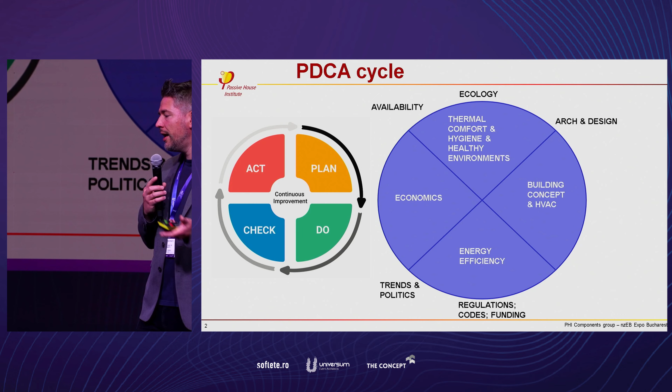What we're actually doing in all of building physics, architecture, and engineering is a management system. We have this PDCA cycle, maybe you've heard of that: plan, do, check, act. It's like an ever-spinning circle, and we're trying to optimize things along the way. Optimizing means not only energy efficiency or lowering energy consumption, but also finding the economic sweet spot, having healthy indoor environments, achieving the best possible thermal comfort, superior indoor living quality, and finding a proper building concept that suits you well.

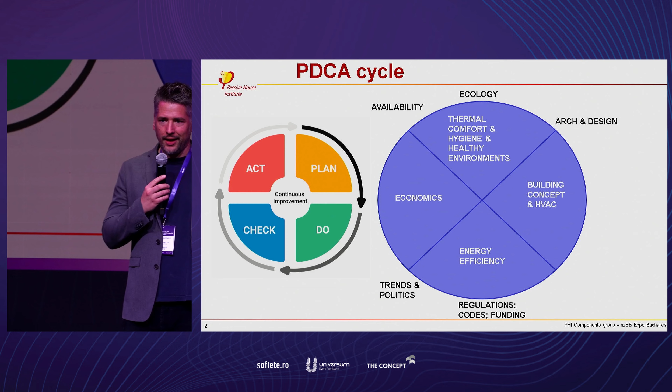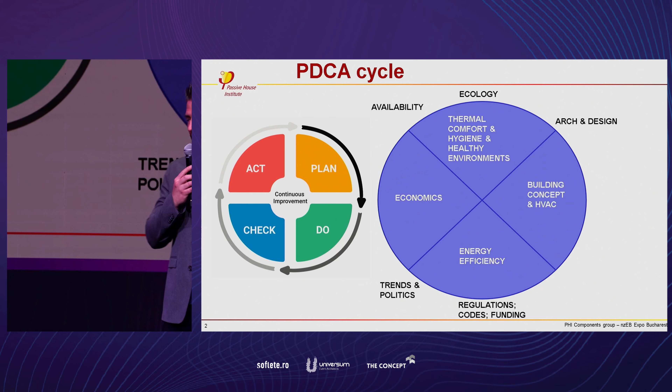We are heavily influenced by external factors such as policy, regulations, and fundings, and this is continuously changing over time. So we need to adapt very quickly, and what I would propose is to do it right away, regardless of the politics, and strive for a concept that meets all these criteria from the very beginning.

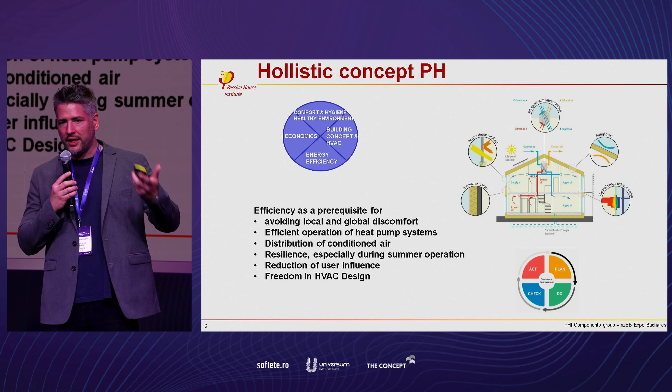We are also trying to achieve economic sweet spots, and to achieve that we need an efficiency that allows us to meet such standards. It's actually a prerequisite for several things, such as avoiding local and global discomfort. Comfort is what makes people feel comfortable in their living environment - influencing factors like humidity, air temperature, and radiation temperatures, but also local discomfort such as drafts. For example, when you're sitting in front of an old window, you feel the cold air descending.

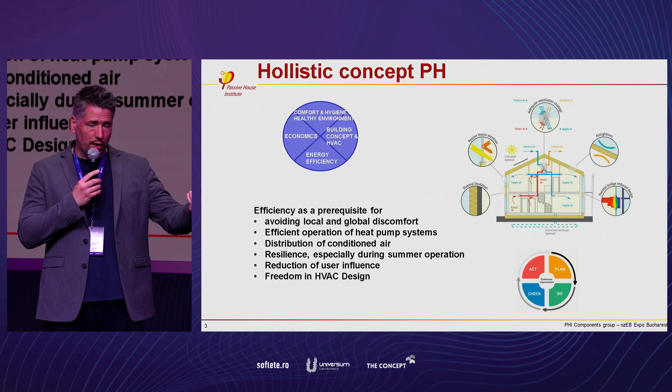It's also a requirement for efficient operation of a heat pump system - the lower the temperature difference for a heat pump, the better the efficiency. You're flexible in the use of systems, and it allows you to distribute conditioned air also via the supply air.

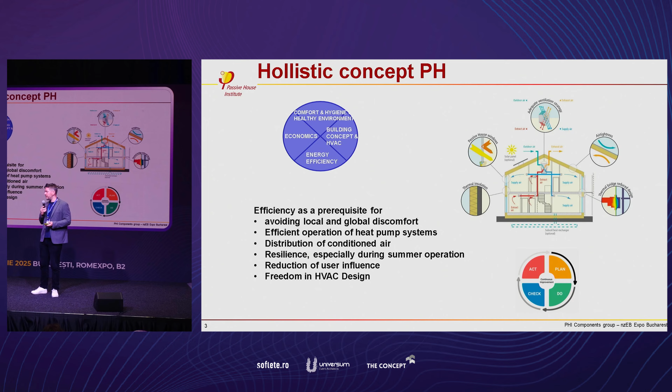Another really important factor, and one we're talking about today, is resilience. We are in the middle of a climate change - it's nothing that is coming up, we are already in the middle of it. That means summers will be hotter, sometimes drier, sometimes more humid. We need to make our buildings more resilient so we can achieve thermal comfort also in these ever-hotter periods. Achieving efficiency helps us get better summer comfort, better operation during summertime, with lower electricity grid peaks and so on.

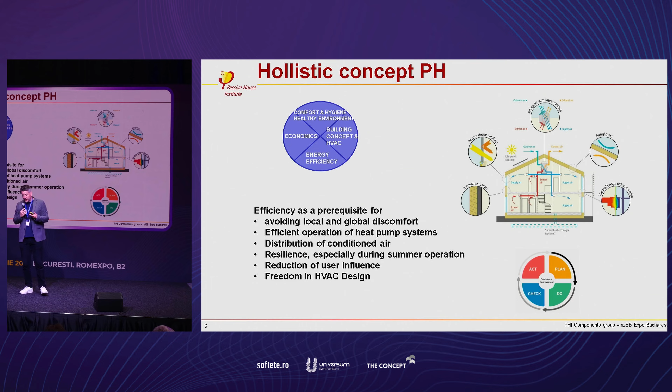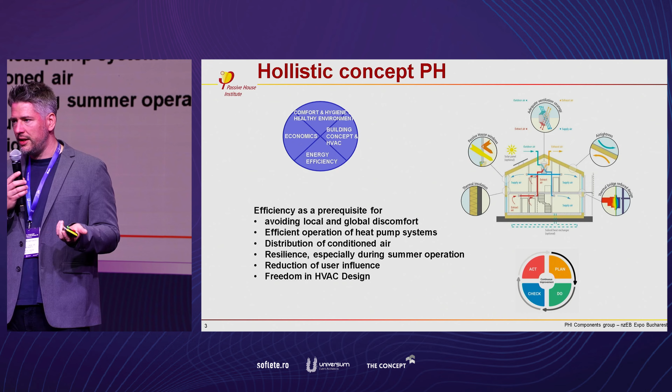Another aspect that comes into play is the reduction of user influence. The more efficient and robust your building is, the lower the impact of user influence - it doesn't matter if we turn up the heating to 25 degrees, the consumption is still lower compared to an uninsulated building, for example. Another aspect: efficiency gives you a certain freedom in the design of your building. You can, for example, have windows from floor to ceiling without any radiators. You can heat via the supply air, by conventional heating, and so on.

So I chose 5 main topics that we need to address when we talk about efficient components. The first one, which I already mentioned, is summer resilience. That means we need to think of passive measures - can we use passive shading? Can we use insulation with cool colors? Do we have HVAC components that work for both winter and summertime? For example, reversible heat pumps that can provide summer cooling and also distribute heat during wintertime.

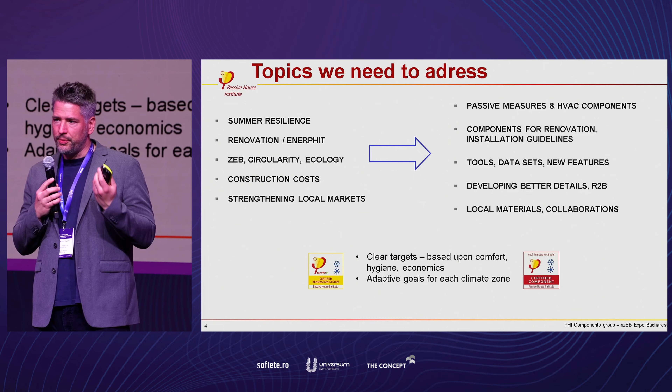We need to look at renovation, because this is actually the key to mitigating climate change - it's not new builds. That's one part, but we need to think of the existing building stock. We need to think about how we can renovate them efficiently to avoid lock-in effects.

We need clever designs, we need installation guidelines, we need a practitioner's tools to make that work. We need to think of the regulations and the directives, like the Zero Energy Building Directive. What will that be for our building concepts? We need to think of circularity of materials, ecology, and where we get our materials from.

So therefore, we need to develop tools, available data, we need to be very transparent and have new features implemented in the database guidelines and in the database. Construction costs is a very complicated topic because that is one of the big hindering factors for being efficient.

Sometimes efficient design does not need to be more expensive than conventional design. It's about repeating details. It's not for reinventing the wheel all the time. It has been done 10,000 times. So let's use the details that are promising to make construction cheaper and also more efficient.

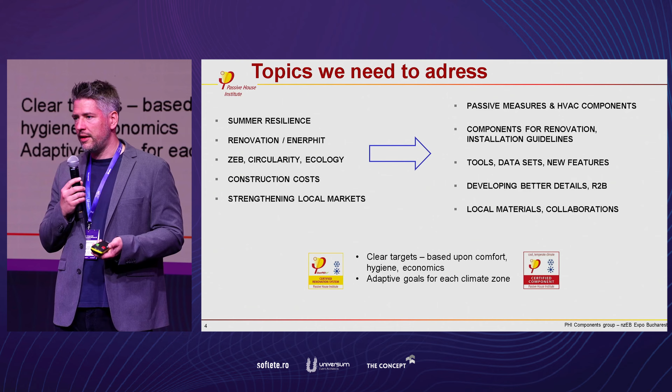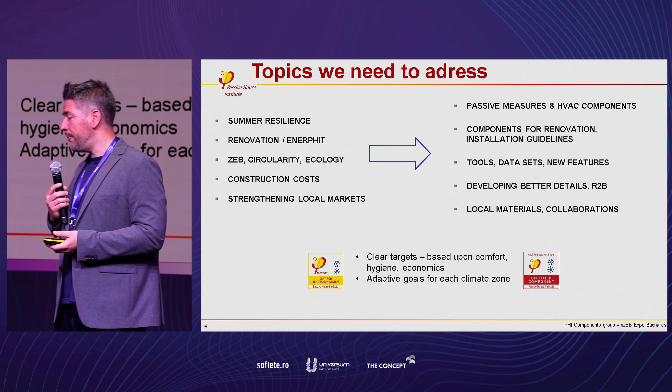And on the other hand, we need to strengthen local markets. That is a very important factor also from an economic point of view, that the building should financiate from itself and mainly be supported by local manufacturers, local craftsmen, educated people that work on site also for the local economy.

So this is what we are addressing in the component certification, which is based on clear targets, on the one hand based upon comfort, hygiene and economics, and we have adaptive goals for each climate zone.

So when you would visit the database, you can find approximately 1,300 certified components from approximately 40 categories, and they are optimized for different climate zones, right? So it doesn't make sense to have like a quadruple pane maybe in Spain, and this is why I said we are trying to find the optimum.

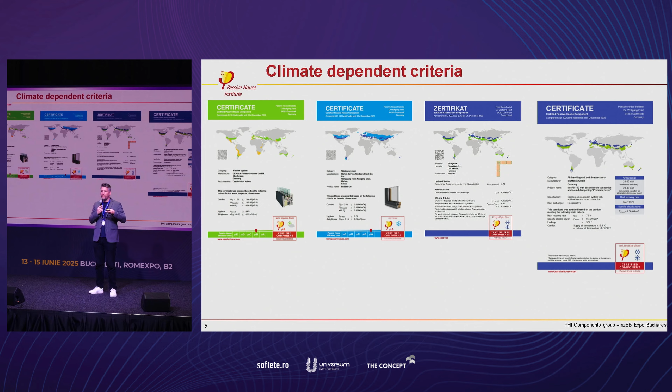So for each climate zone, we would recommend the values that are needed to achieve hygiene and comfort. And so when you look at the certificates, you can find that you can see the world maps indicating the recommended climate zone, right? So this is based on economic considerations in different categories.

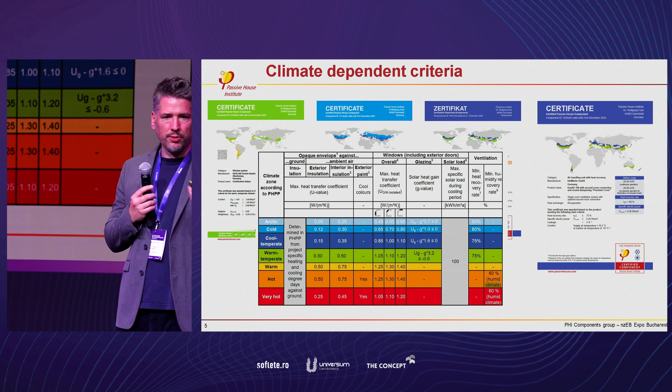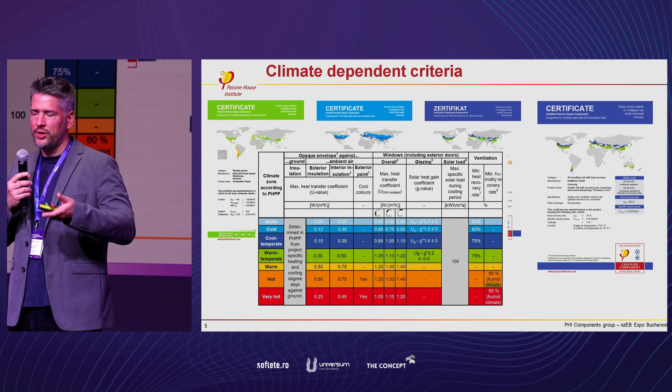So you can find like the recommendation to achieve passive house or EnerPHit standard that should cover all ZEB requirements easily on this list, right? Because the ZEB definition is actually a building that consumes so little energy that it can be covered by renewables on site. So that is actually by definition kind of a passive house, right? Because all other buildings will not manage to cover the consumption on site.

So when you would look at the database, you could find the recommended values for the different topics, for example, for the transmission values, for the walls. You can find it here.

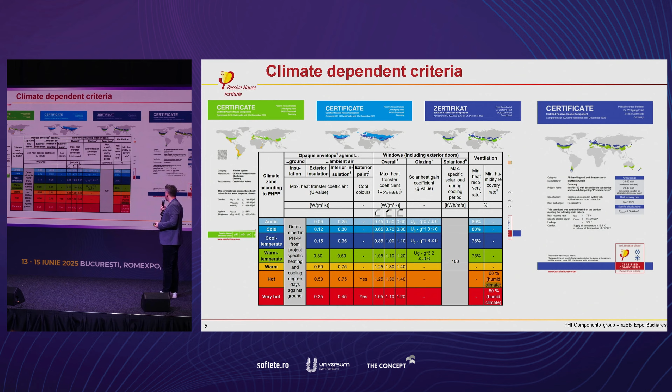So the component database is a free-to-use tool, right? So all these components are incorporated in the Passive House Planning Package as well as on the component database, and all these data are there transparently shown.

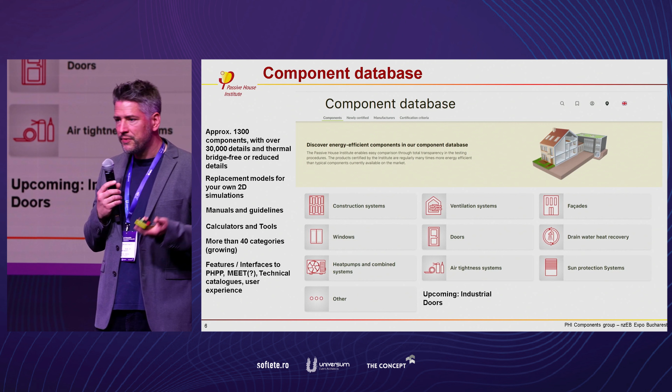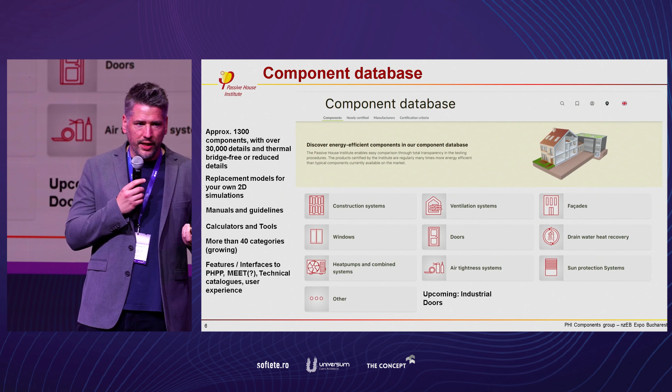With approximately 30,000 details right now that are offered for free, thermal bridge free or reduced thermal bridges for the construction of things. But it also contains, for example, replacement models if you want to conduct FEM simulations by yourself. So when you have, for example, a complicated 3D structure, such as a thermal separation for balconies, you can find guidelines how to reproduce them for yourself in your simulation.

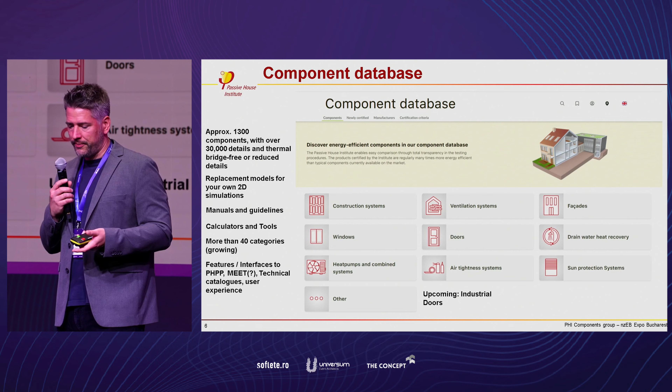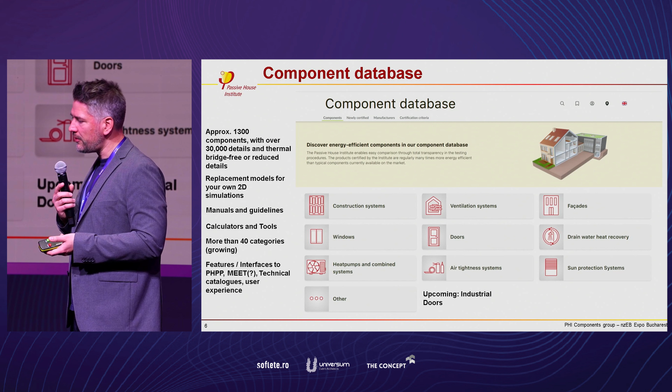It contains manuals and guidelines, some calculators and tools, for example, for windows, window calculators. And what we're trying to meet in the future is that we have a full incorporation into our software kits, such as the PHPP, such as the MEET tool, which allows you to calculate the carbon footprint of a component or of a material, and to develop the user experience more and more.

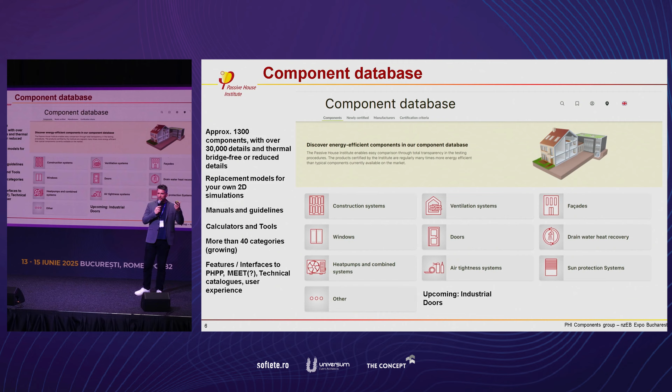So what you can see here in the background is these are the main categories, but each category contains a couple of subcategories, right? So when you would look at the windows, we have standard windows, but we have also window systems, fixed glazings, spacers, and so on.

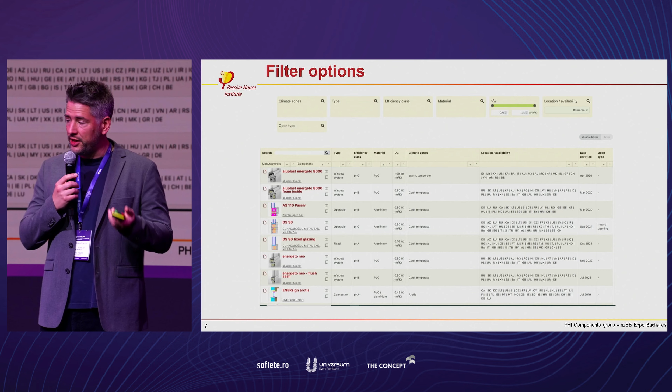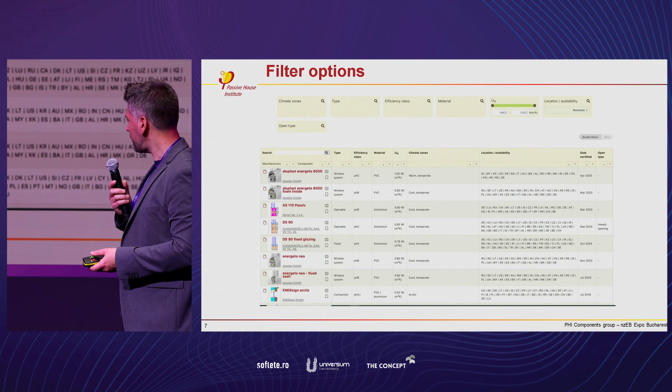Okay, so when you would use the database, you can filter, and this is what I said at the beginning, that this is something really important. So we don't want the components to travel around the world. So you can choose or filter for your local markets, right? So in this case, you can see the location availability as Romania already depicted, and then the database would show you available components, for example.

You can also use the world map and zoom in to see if there's like a production site nearby or a seller, a vendor that can bring the products to your country. When you click on detail, you can sometimes see that there's like a manufacturer, and sometimes they have vendors or resellers, so you can find these suitable options here.

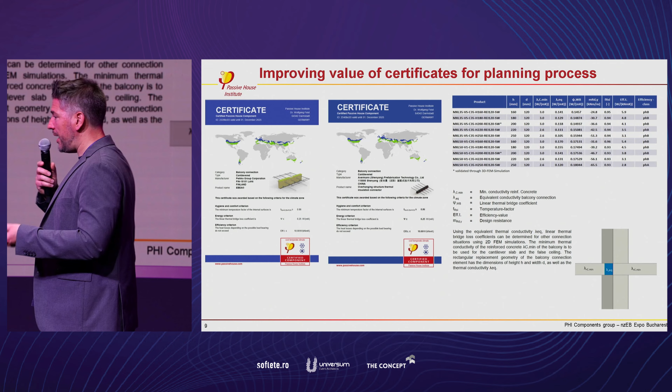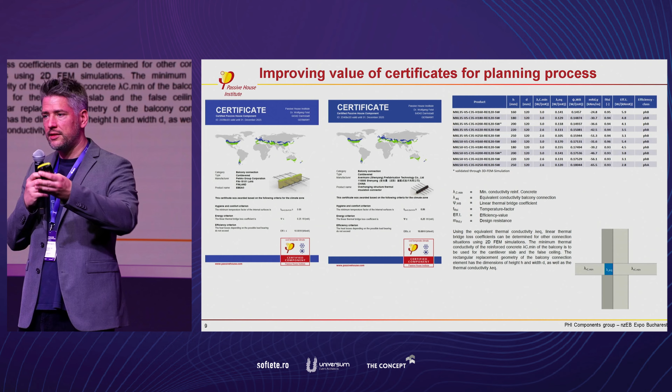Another aspect we're trying to address is improving the certificates for the planning process. In the past, we often just had a result - it says this is the efficiency value, this is the thermal bridge, this is the value whatsoever. So what we're trying to give now is a guideline, a manual, how to use the certificates.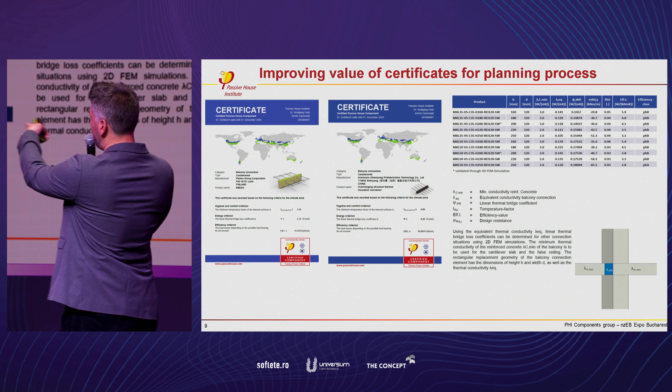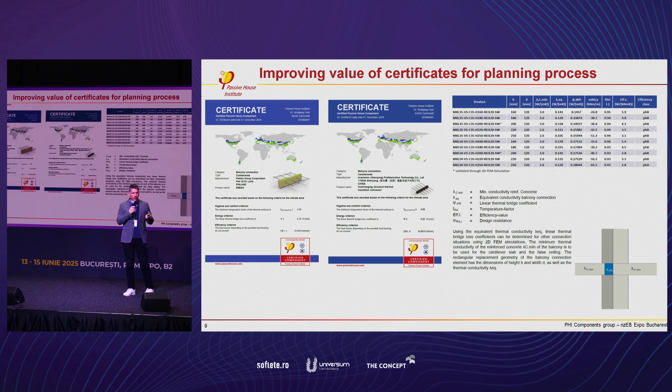And to use them for your own simulations again. So when you look at, for example, a balcony separation element, they're quite complicated to simulate - it's a very complicated structure, you need to run a 3D simulation. But this certificate contains 2D replacement values, so you can run your own 2D simulation with a substitute model like that, so you can use that for your own simulations.

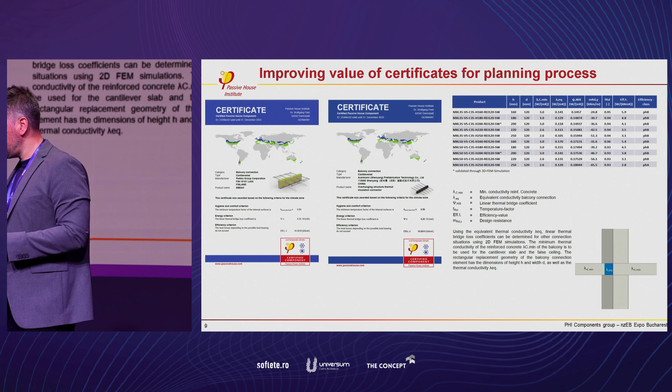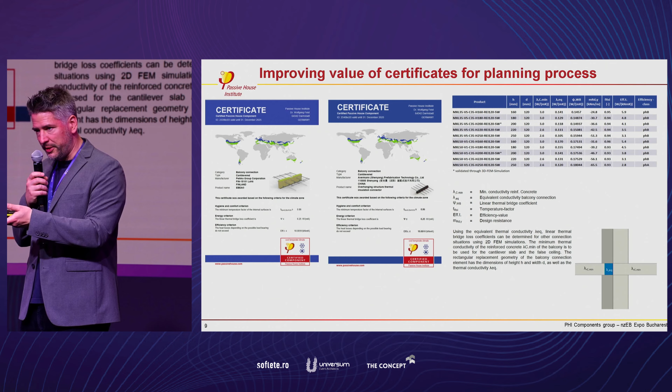And if you don't want to use that, you can still find the thermal bridge itself on the certificate, but sometimes it makes sense, especially when you have a changing construction or a combination of different materials - for example, in combination with a terrace door.

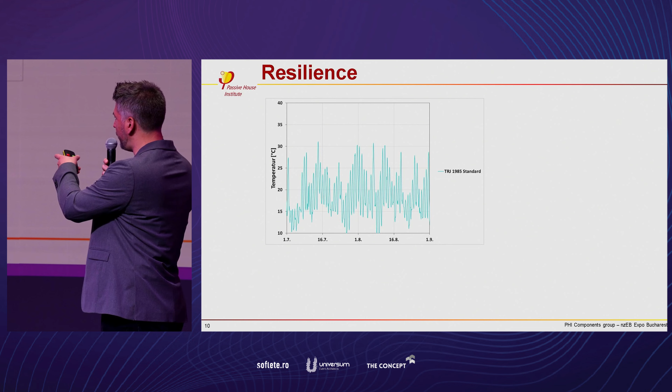One main topic is summer resilience, or climate change and how that will impact us. What I'd like to show you, when I'm conducting summer simulations to see if there's a frequency of overheating, is the different data sets for the design period. You can see the design temperature for the year 1985, then 2004, 2010, and the 2035 prediction.

And when we look at the 2050 prediction, we even get bigger amplitudes. So on the one hand, we have a general increase in temperature, but what is really challenging for us building planners are the peak temperatures - especially the hot nights, which we cannot release as easily.

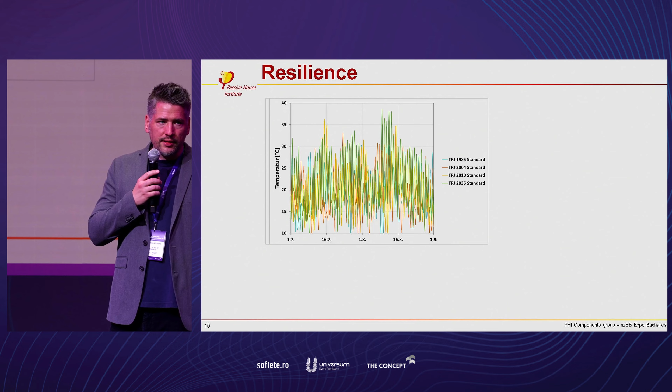So that makes certain passive measures not as effective anymore. When it's 29 degrees outside at night, it doesn't make sense to open your windows because you cannot release the heat properly to a comfort level. If comfort temperature during summertime might be 25-26 degrees, and it's 29 degrees outside, we are not improving comfort anymore. So we need to think about what we can do in these climates in the future.

In the region where I come from, nobody had an AC in the past - that was inexistent, I never saw that until I was an adult. Now it's become kind of mandatory to achieve summer comfort in uninsulated buildings, because you cannot release the heat through the windows anymore, and you cannot use the building inertia to the same extent for summer strategies. This is something we need to address.

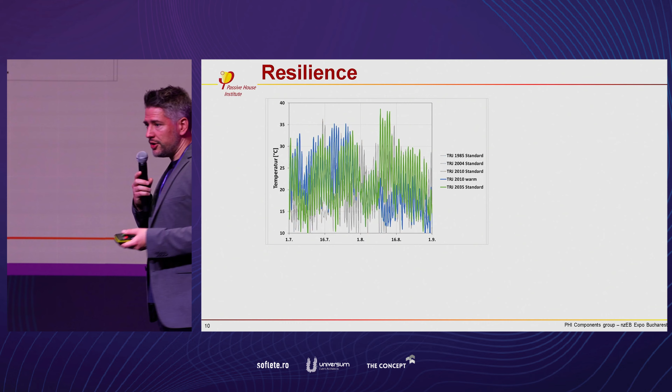It's becoming more and more of a challenge, and this is something we have to tackle - we as planners, we as manufacturers, we as policymakers, whatsoever.

This brings us to a situation where cities are more and more storing heat. We have low albedo values, like streets being very reflective, black cars reflecting everything - the heat is stored during the day and cannot be released during the night, and we can clearly see that. This is a real challenge for cities, and it also means that when we use active cooling systems like ACs and chillers, they will release more heat and heat up the cities even more. So we need to rethink the inner city context.

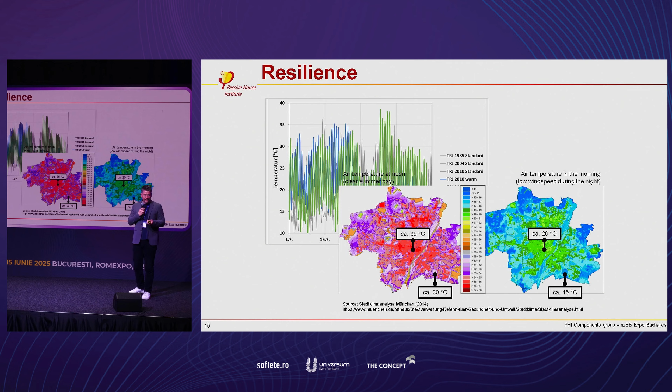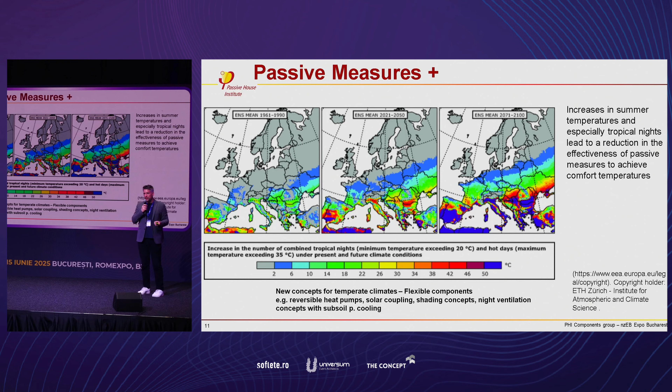That means these days passive measures don't work as effectively anymore, or it's hard to release heat out of our buildings. So we need actually new concepts for temperate climates - hotter climates are kind of used to it, we face other problems here like grid structure and peak electricity, but we need to find solutions in terms of solar coupling, shading concepts, night ventilation, whatsoever.

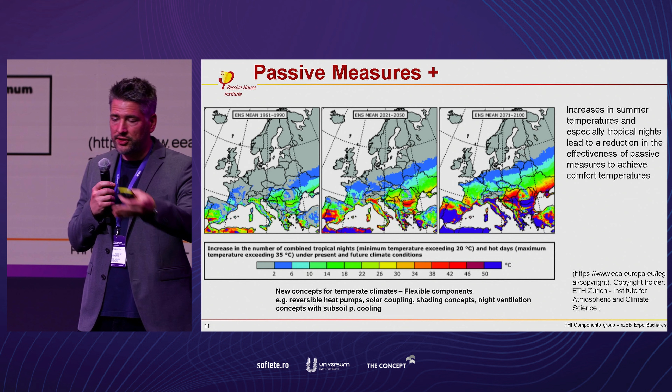So it might be the case that we need pre-cooling via subsoil heat exchangers instead of taking the direct air.

One thing that becomes more and more important is external shading systems. This is also a learning curve, because when you have an AC running, you might not realize how much heat you actually have to cool down and what that means.

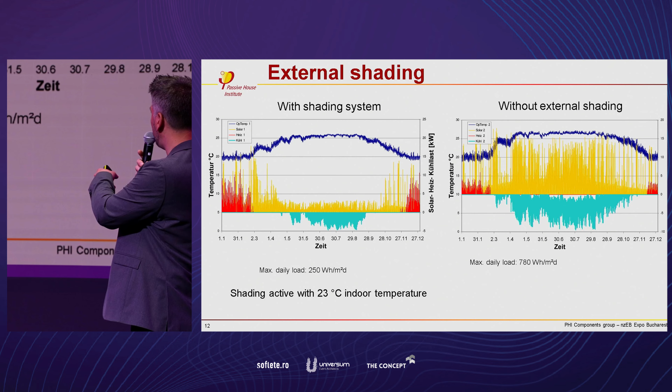So I'm just showing you one example of the difference between a shaded window with an active roller shutter and an unshaded situation. You can see that the daily load is 3 times higher compared to the shaded one. This is actually a passive measure that doesn't cost you any energy and would help us make use of.

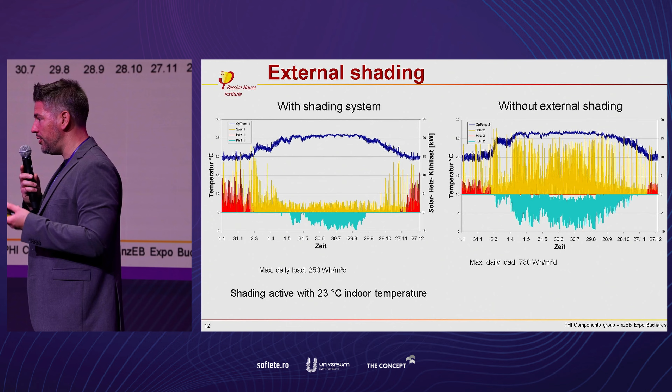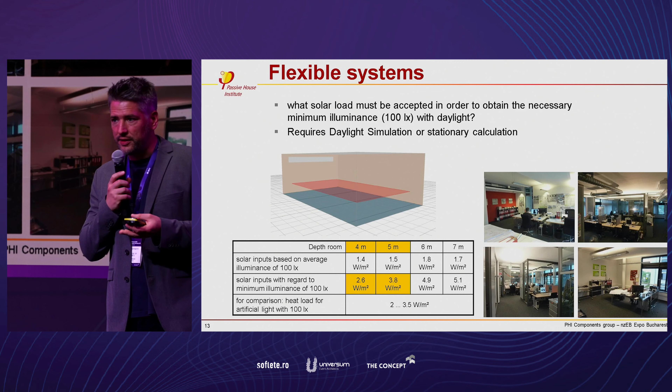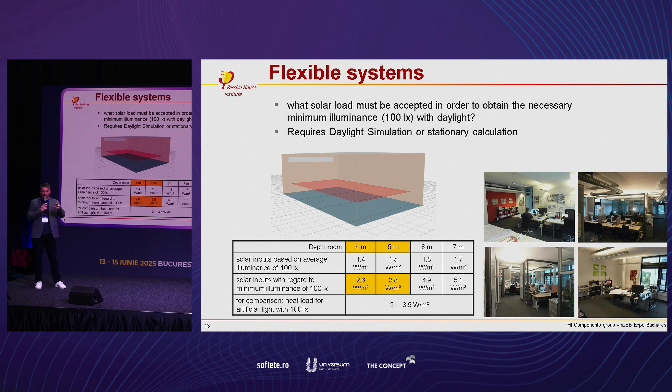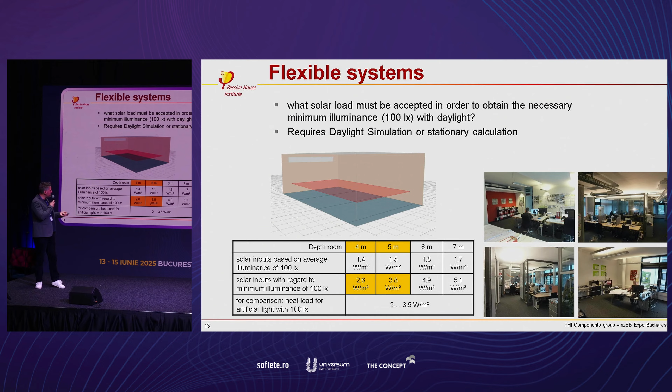We also need a certain development here, because what I often see in consultancy projects is when offices are shaded, they become kind of dark, so what happens is we use artificial lighting again and counteract that. You get these darkish offices which require artificial lighting although the sun is shining. So what we often try to do is find a sweet spot, and calculate the point when the artificial lighting electricity consumption is higher than the cooling demand, for example. It's a challenge for us as engineers.

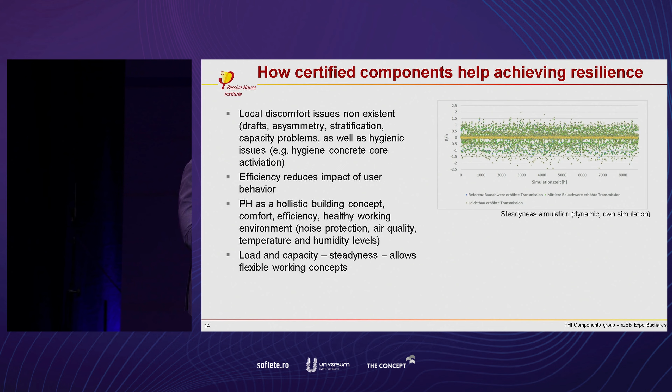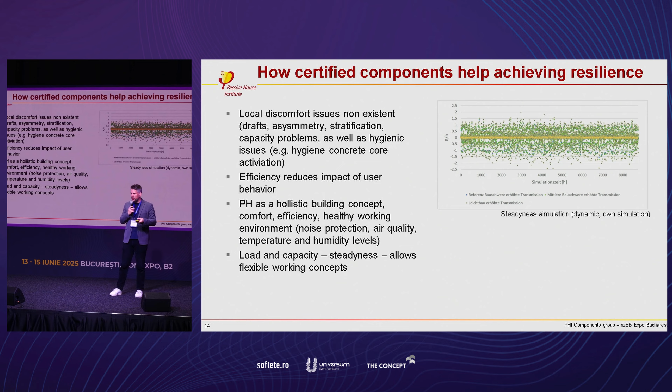The good thing is when you have certified components, you get rid of all the local discomfort issues, as also during winter time, such as stratification, drafts, radiation asymmetry, and you have solved all hygienic issues. So you will not have condensate on the panes forming, you will not have mold growth on surfaces because the water activity is also reduced.

It reduces the impact of user behavior, and the passive house is, what we should not forget, is a holistic building concept. So components is one part of it, the planning process is another one, but we always try to find a way to achieve an economic optimum for resilience, efficiency, and what is really the most important thing, healthy indoor situations.

We are spending so much time of our lives indoors, so we should really focus on having healthy situations. And I'm not just talking about humidity or CO2 concentration, thermal stress is among the highest risks of mortality right now. Looking up the numbers of fatalities during summertime in Europe, these are tremendous numbers.

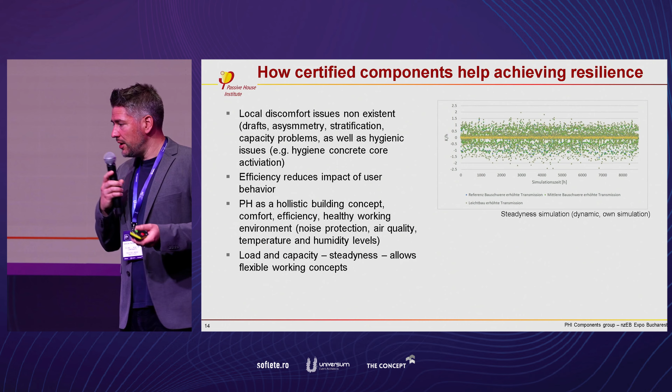Load and capacity is another aspect, but that is just the result of that.

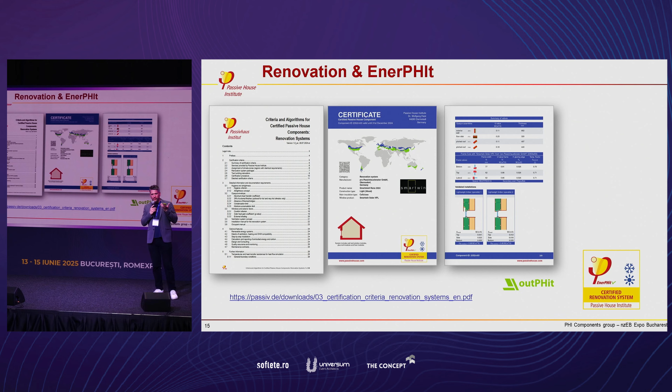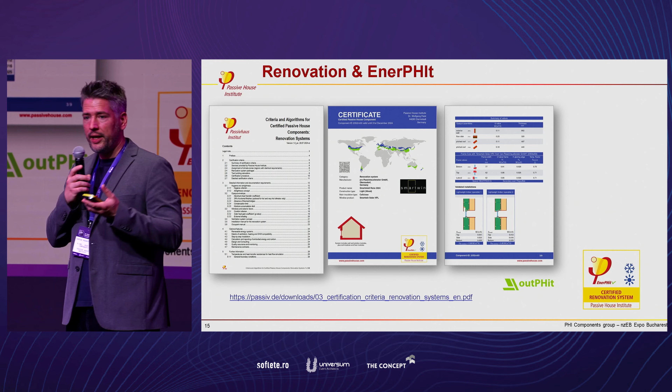Another thing we would like to address, and this is what we also do in our certification lines, are the renovation systems. What I said before is applicable for new builds, but also for renovations. But for components, we actually need to tackle the existing structures, so we developed renovation systems that can be certified under the EnerPHit labeling.

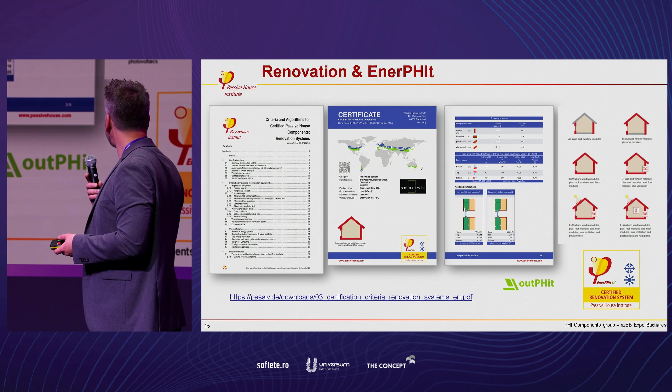And you can choose the grade of that, so up to a full house renovation, but you can also start with windows and walls, or also implement the HVAC. What we are trying to do now is upgrade the windows to so-called EnerPHit windows, so that it's easier to install for existing buildings. So you may not necessarily need an installation in front of the wall, you can also direct mount the windows, but we need to develop some proper details of that.

This especially tackles construction costs, because the actual costs don't lie within the components itself. They usually lie within manpower and site costs, such as scaffolds, bureaucracy, demolishing, waste—these are the costs that really drive up industrial costs.

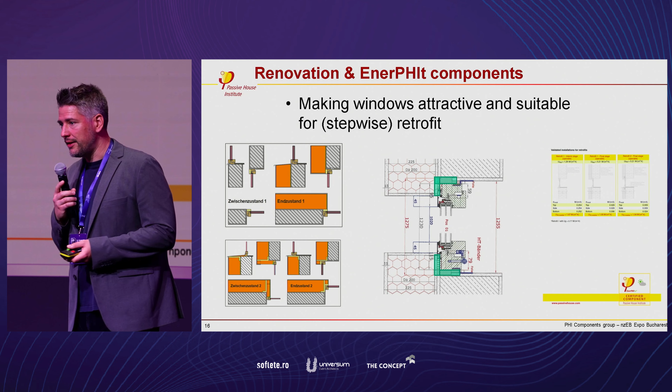And if you manage to install a window within an hour instead of four, then a passive house window is by far the cheapest option. It pays off by itself due to the energy savings, but it could initially pay off too. So that means we need to upgrade the installation situations to get continuous insulation layers.

What we also need is collaborative concepts, and this is something the whole industry is struggling with. Everybody's looking at their specific fields. A window manufacturer does not necessarily look at the installation, they don't necessarily look at the mounting, they don't look at the shading. So we need ready-to-build details, collaborative structures, also when it comes to installation, engineering, whatsoever. All these things can be combined in a far better and more effective way.

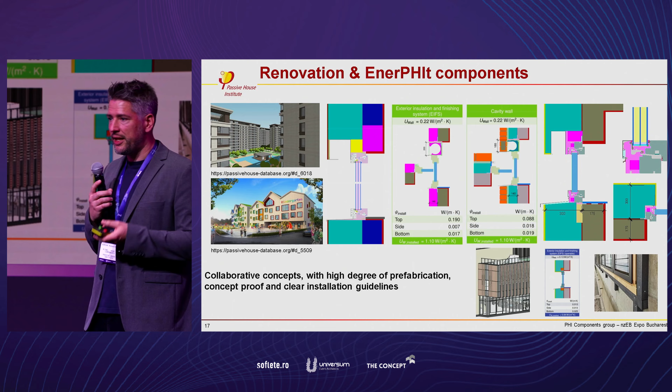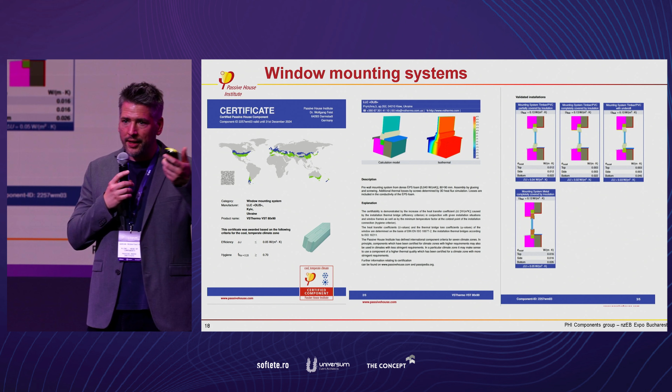The same applies for the window mounting systems. They are very flexible, and we got a certification line for that, but we need ready-to-build details, clear instructions, good guidelines. We often have a scenario where the windows are installed and two weeks later the facade builders come and don't know how to install the components properly, driving rain secure and whatsoever. So these are the things we are challenging.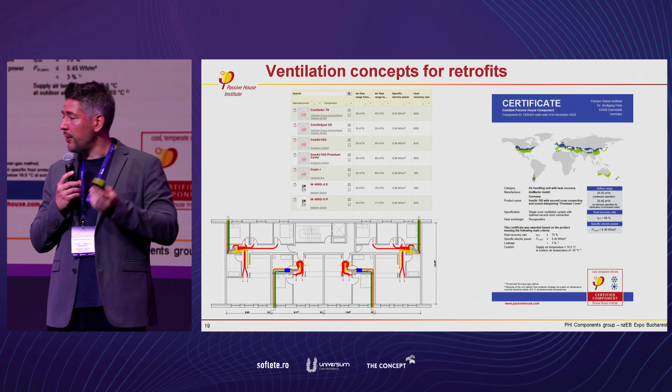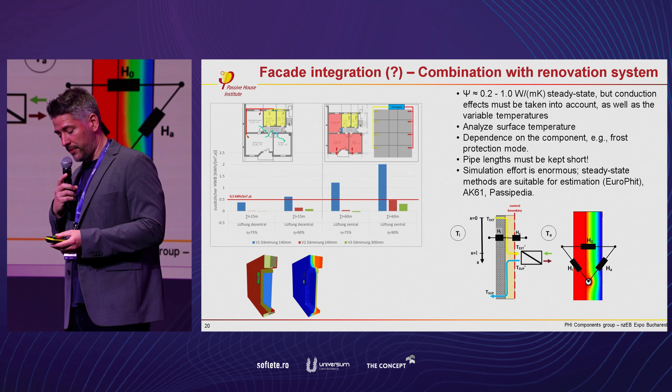That was one of our last research projects my colleague Christine and I did last year. We looked at the impact of the ductwork installed in the insulation layer, so you can actually do it properly when you have a sufficient amount of insulation. So that could be a new take for renovating ventilation units.

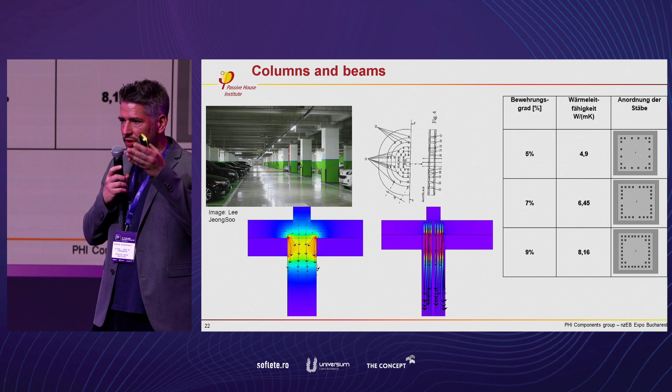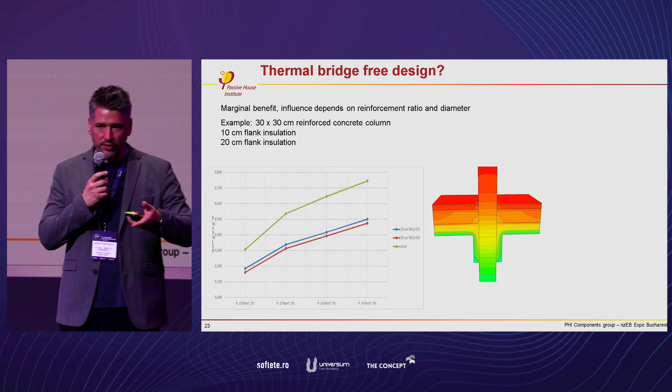Another aspect to mention: there are always some things we cannot decouple, but they're still necessary, such as columns and beams. These are highly reinforced structures, and you cannot cut them off and put insulation in between. So we need to reduce the impact. Sometimes it makes sense to have flank insulation, but that only gives a reduction up to a certain extent. If you have a 1 meter diameter column in a parking garage, you will not put 30 centimeters of insulation around that, because you'll use up the parking space. So these are a couple of things we always need to address.

I'm spending too much time on that now, but these components sometimes need a different assessment. As I said before, by their nature, they cannot be thermal bridge free. So therefore we might need to look at some hygrothermal points, like dew points and so on.

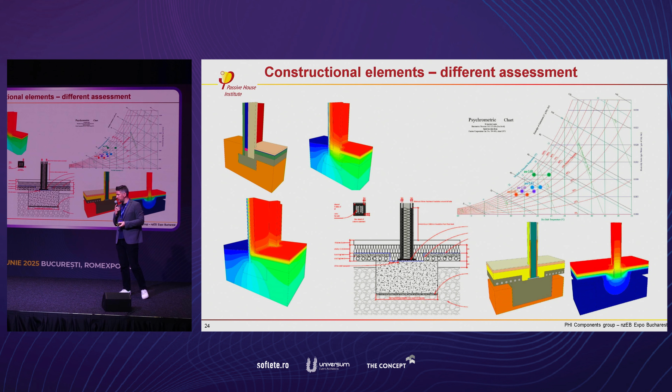That was a bit rapid, but just to address a couple of things. I want to sum up my presentation with an advocacy for certified components, because they allow for a contribution to mitigate climate change, and it becomes more of a challenge the longer we wait.

You can participate in development for these components, and there are so many fields, so many niches, so many things to address. I think it's really great what's happening here today, and also to talk to the manufacturers about what they do to improve our lives. It's a fascinating era. Although it's challenging, it's something we can all contribute to.

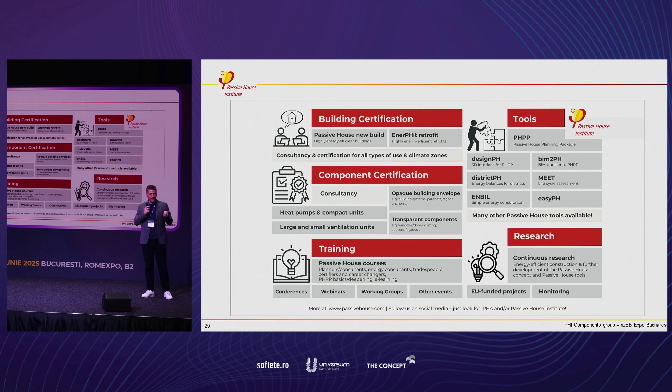So this is just a quick overview of what the Passive House Institute has to offer on a very rough level. Sorry for rushing through this, but thank you for your attention. Thanks for having me here, and I'm happy to take any questions.